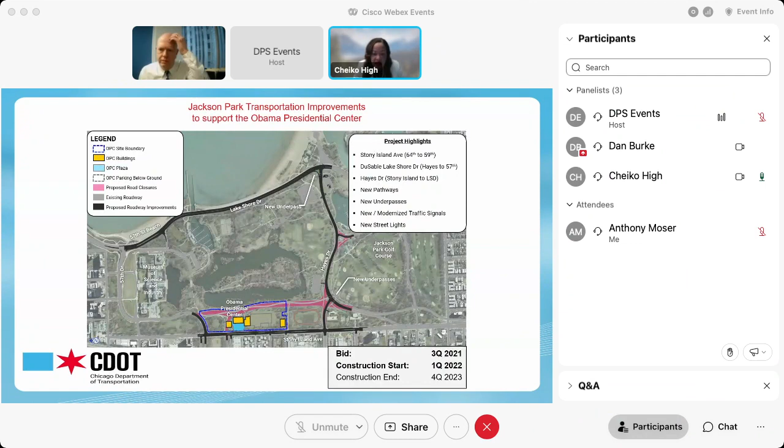This project did not take a quick route. It took us about 5 years to make sure that we got this contract tight when it comes to workforce, contracting opportunities, and partnerships. Our partnerships include the Park District and, of course, the Illinois Department of Transportation. So this was a collaborative effort for all entities.

The scope of this project, safety is always first. So we're going to have components of safety, not only with traffic signals, but also roadways and pedestrian safety, bike safety, things of that nature.

One of our closest partnerships to make this opportunity what it is today is working with the Chicago Cook Workforce Partnership, between the Partnership and FH Paschen. We're really going to make sure that we meet or beat our contracting percentages for this job. You can find out more information about this job at our website, jacksonparkimprovements.org. Next slide.

Specifically, we're going to take a deep dive on what we really did different and better on this job when it comes to workforce and contracting goals. This project has the highest ever project goal for local area residents, and that percentage is 15%. That means 15% of workforce hours performed must be by residents that live in that area.

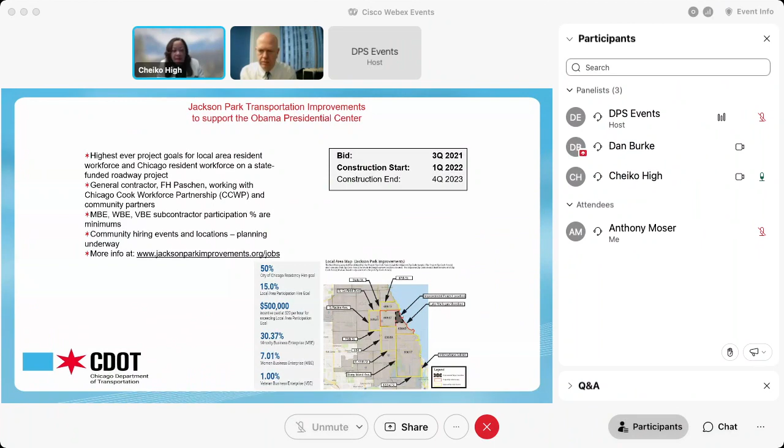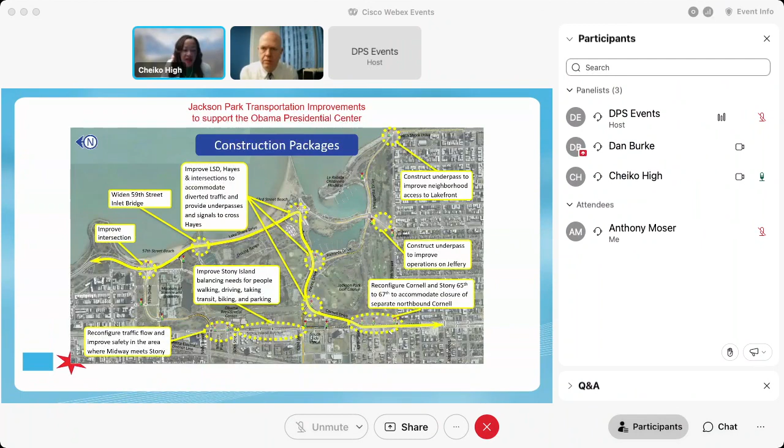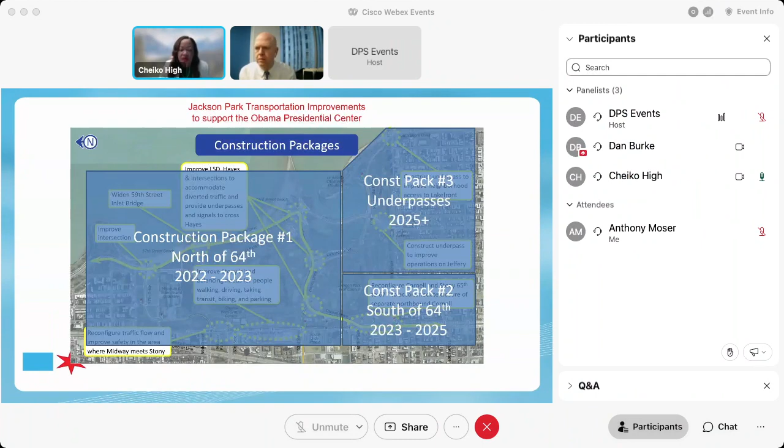With this, if you hit the button one more time, it will highlight bid package 1. That package was already awarded to FH Paschen. Package 2, and I think this is an opportunity that most of you are here today to hear about, construction package 2 will be south of 64th Street in the year 2023. And the final package, package 3, will be in 2025. Next slide.

This is an aerial view of Jackson Park, and this is basically the work area that CDOT will be improving throughout the Jackson Park area. Next slide.

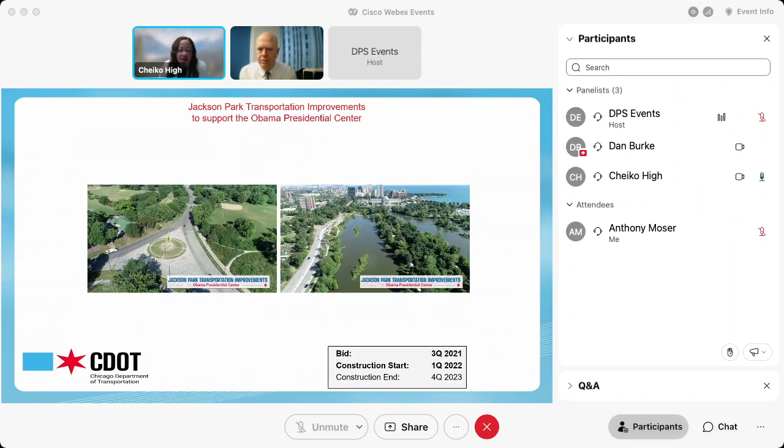Thanks, Chieko. Yeah, just a lot of exciting things happening in Jackson Park to support the transportation improvements for the Obama Presidential Center. So some more, let's get back to some of the work we have coming out this year.

We're really excited about our 2022 Arterial Resurfacing program. There's 37.2 miles of roadways that'll be in 4 contracts. We anticipate bidding those contracts late Q2 of this year, with the start in the 3rd quarter and construction in the 2nd quarter into 2023. Again, as usual, it will be split into 4.

We split the city into 4 zones: north from city limits to North Avenue, from North Avenue to Cermak, from Cermak to 79th, and then from 79th south to the city limits. Look for those again, hoping to get those on the street here soon.

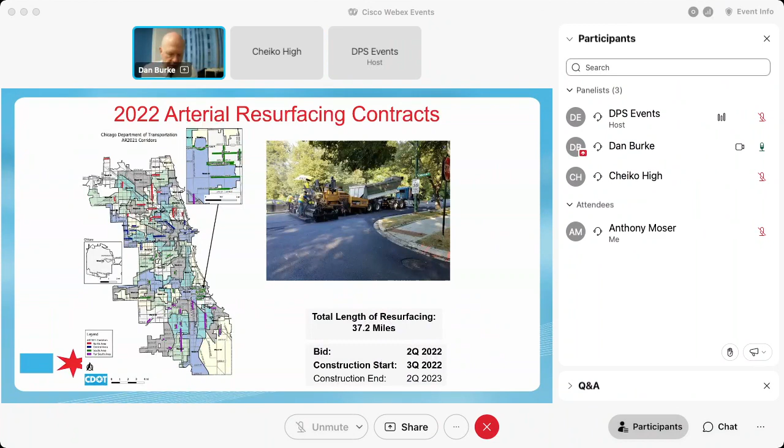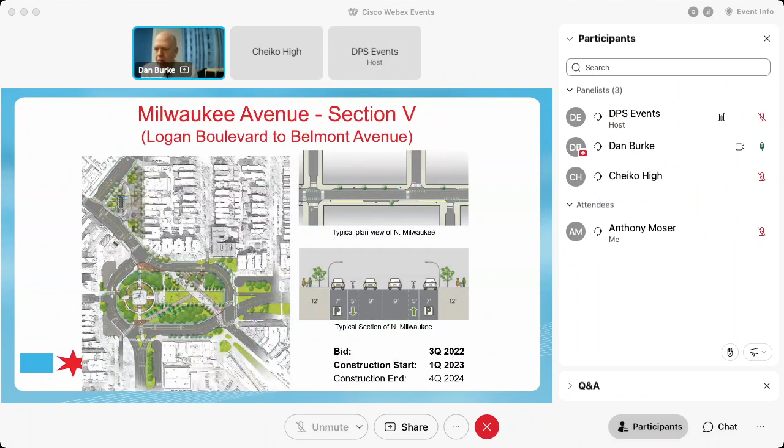Milwaukee Avenue, Section 5, Logan Boulevard to Belmont. This is an exciting street reconstruction and streetscape project with a lot of community involvement and input. We're seeing a redo and reactivation of Logan Square and the monument area. We're looking to get this project out to bid third quarter of this year, with a 2-year construction schedule.

Lake Street, Ashland Avenue to Halsted. This is a complete reconstruction of the full Lake Street right-of-way. I believe this is the eastmost and final segment of this project. We're excited to finally get this one out to bid and going. Look for this to be bid fourth quarter of this year.

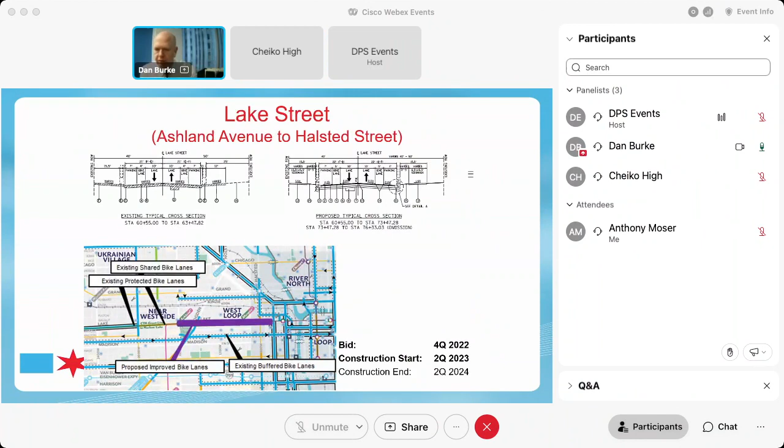Cermak Road, 47th to Kilbourn, viaduct vertical clearance improvements. We'll be looking to get this bid late second quarter of this year. It's a viaduct vertical clearance improvement project. We anticipate awarding that fourth quarter this year, and I believe there's a 12-month duration on that construction.

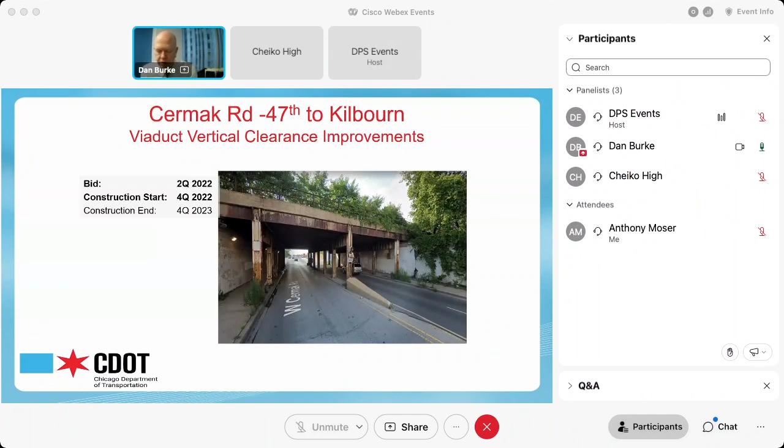On the transit side.

State Lake Elevated Station. This is a new signature station at the corner of State and Lake Street on the Loop elevated system. This was designed by TranSystems and SOM for the Chicago Department of Transportation, in cooperation with the Chicago Transit Authority. Now we are piecing together funding and looking to have this out to bid fourth quarter of this year, with construction start second quarter in 2023 and a 2-year construction schedule.

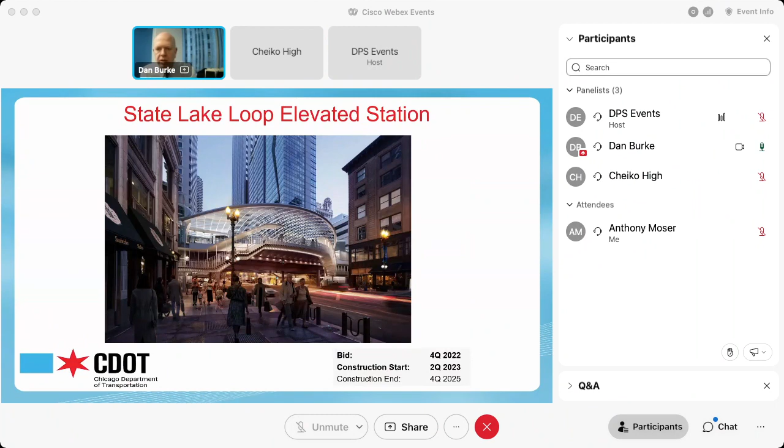It's going to be a transformational project. That existing station, as many of you may know, dates from the 1890s. Its platforms are only 7 foot in width. It's the second busiest station on the CTA system. This is going to be a complete replacement of that station with a really exciting modern 21st century transit facility.

Just some more renderings and concepts on that, what it's going to look like. It's going to have a domed glass enclosure, with a lot of beautiful new state-of-the-art amenities, and it's going to change the dynamic of that corridor as well. We worked very closely with the State Street Council and all the surrounding businesses on putting together this plan and building a coalition around it.

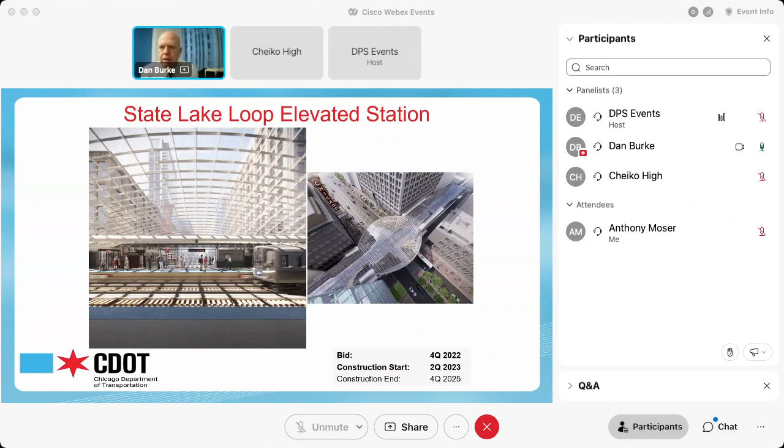Streetscapes. A lot of streetscapes coming out this year. We're excited to be putting these on the streets. This is Lubica Benick in our project development group, and she's extremely busy this year. These are the neighborhood type improvements that bring reconstructions of primarily business districts, the public way within business districts, and really activate and create great public spaces for people to use and to support those area businesses.

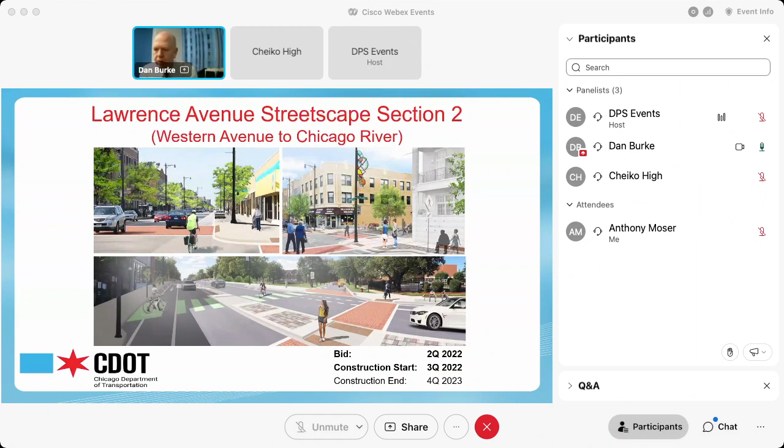This one at Lawrence Avenue, Western Avenue to Chicago River, we anticipate bidding second quarter of this year, hopefully getting it started late third quarter.

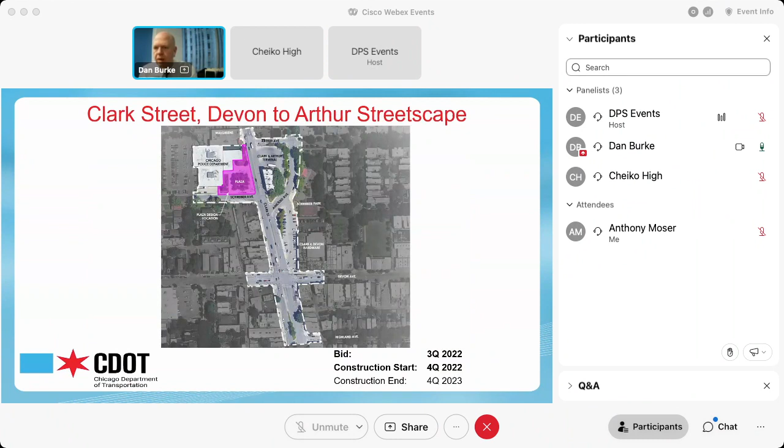Clark Street, Devon to Arthur Street streetscape, another streetscape, looking to go out with that third quarter of this year, with the contract award in fourth quarter and a 1 year construction schedule.

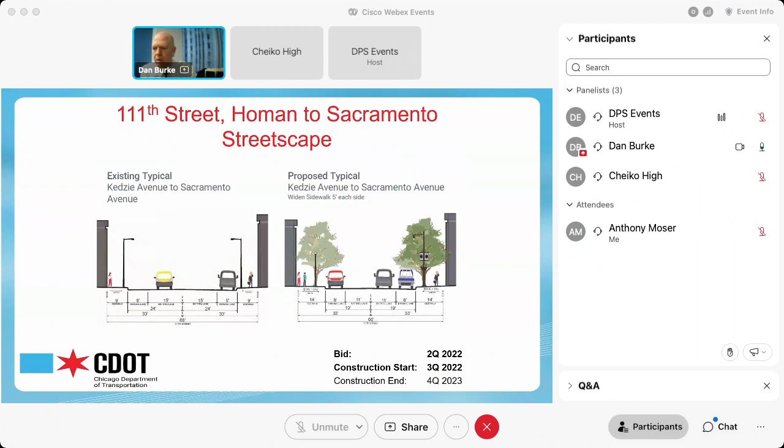111th Street, Homan to Sacramento streetscape, just some exciting things. If you look at the two cross sections between the existing and what you have today and what the revised will look like, and just the activation of that space and the architectural enhancements to that community. Looking to put that one on the street second quarter of 2022 with the construction start in third quarter and a 1 year construction schedule.

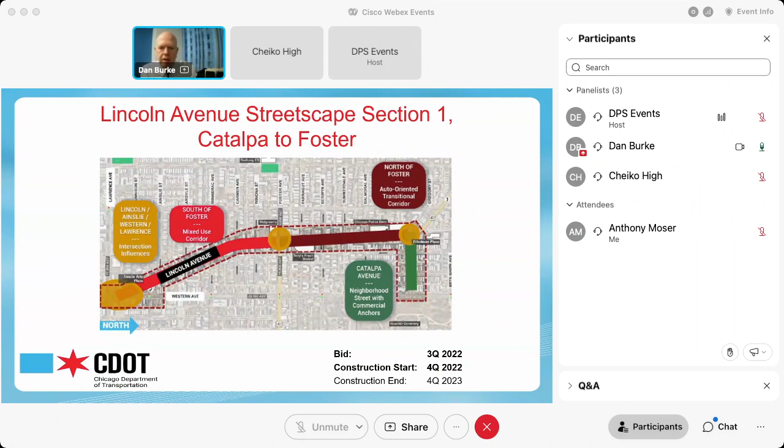Lincoln Avenue Streetscapes, Section 1, Catalpa to Foster Avenue. I believe there are 3 segments in this, and this is the first of those 3 segments. This will be bid third quarter of 2022 with a fourth quarter start and again a 1 year construction schedule.

Invest South/West South Chicago, Commercial Avenue, Section 1, corridor improvements. This is 90th Street to 92nd Street corridor improvements. This will be bid third quarter of this year, hopefully awarded fourth quarter, with a 1 year construction schedule as well.

Lubica and our team are working very aggressively to finish up, get community input on these, and work through the design and get these put up on the street for bids.

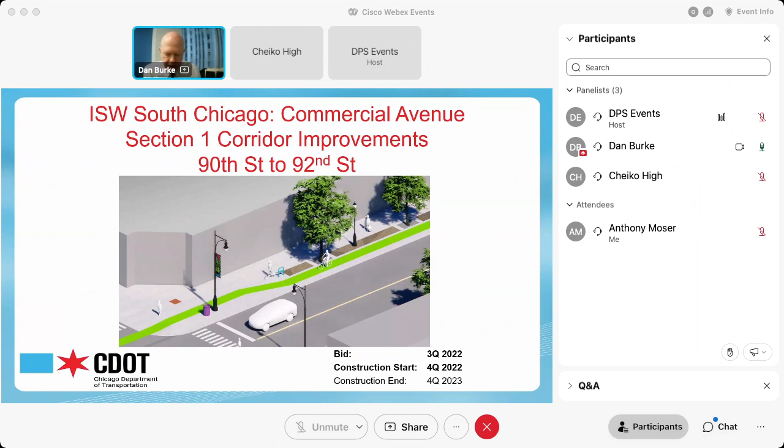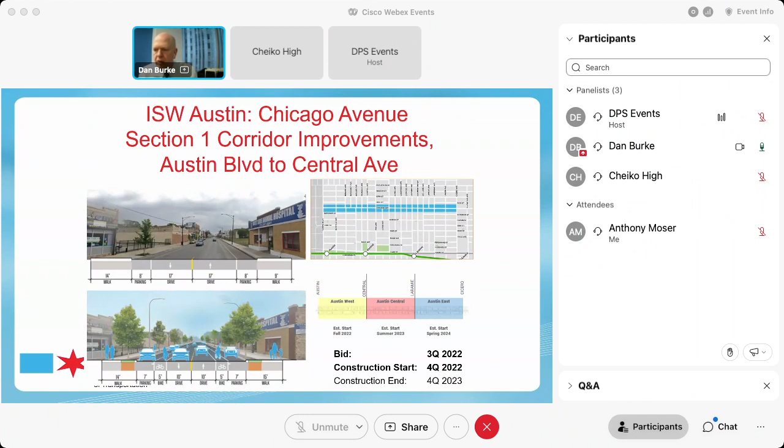Invest Southwest Austin, Chicago Avenue corridor improvements, Austin Boulevard to Central Avenue. There's been a lot of planning process and community input on this. We're excited to be bringing this one to fruition. This is the westernmost portion of the project, and we anticipate bidding it late third quarter of this year.

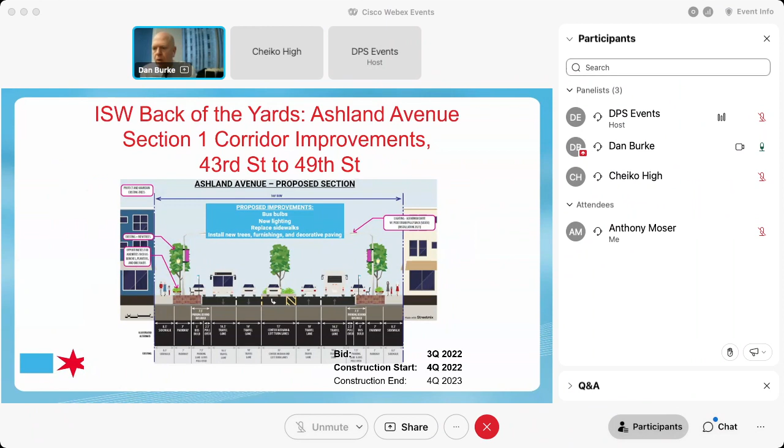Invest South/West, Back of the Yards, Ashland Avenue Section 1 corridor improvements, 43rd to 49th Streets. Looking at that cross section of Ashland Avenue, it's really a very ambitious and game-changing streetscape with a lot of architectural enhancements and placemaking, really changing the whole dynamic of that corridor. Look for that to be bid third quarter of this year.

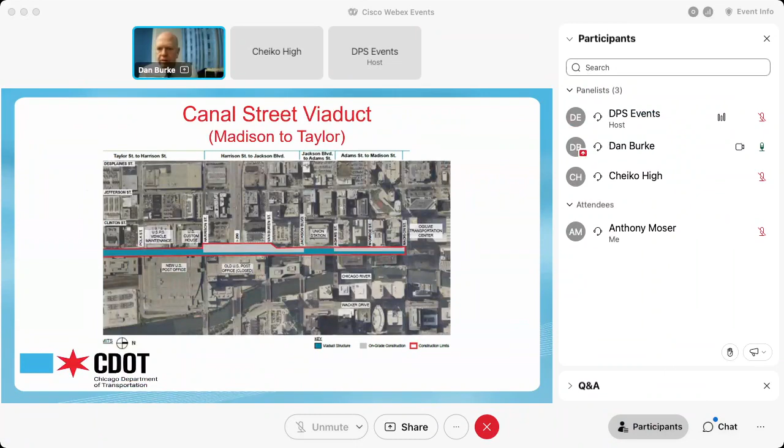Bridge reconstructions. Canal Street Viaduct, Madison to Taylor. This is the first of four. Madison to Taylor comprises 4 sections of Canal Street that will be bid this year successively. This is a division of those. A lot of people may not realize, but Canal Street is a viaduct. It's over the westernmost track of Union Station, both the north train shed and the south train shed. Those tracks extend out to almost the midpoint of Canal Street. It's going to be a very complex, impactful, and involved project.

Mort Kent on our team is the project manager, and Luis Benitez are managing these projects. It will be put out in 4 packages. The first will be Madison Street to Adams Street, Adams to Jackson Boulevard, Jackson Boulevard to Harrison Street, and Harrison Street to Taylor Street. Look for those 4 packages to go out starting second quarter and probably through the first or second quarter of 2023.

Division Street bridges and roadway improvements, Kennedy Expressway to Cleveland Avenue. We're working through some design issues on this. This is a really exciting project. It's a complete reconstruction of the whole Division Street corridor from I-90 to Cleveland Avenue, just west of Clybourn. Fingers crossed, things go well, we'll get this bid fourth quarter of this year with a construction start in second quarter of 2023 and construction end in fourth quarter of 2024. Two brand new bridges in this one, and a widening and reconstruction of the street in that entire corridor.

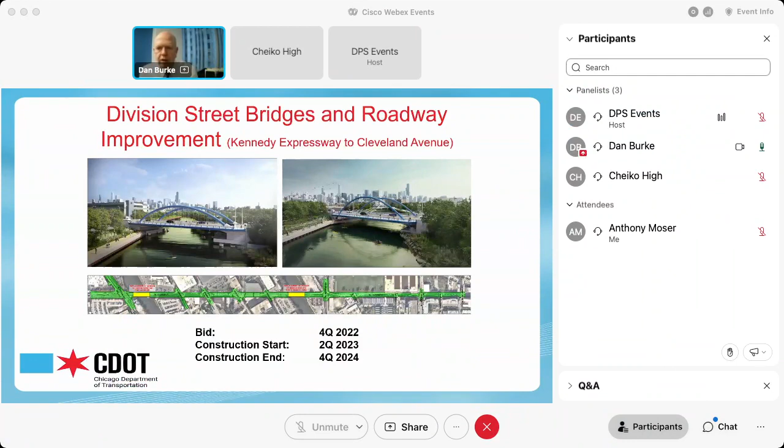Grand Avenue Bascule Bridge repairs. This structure is a double leaf trunnion style bascule bridge, approximately 270 feet long with a roadway of 36 feet. It was originally constructed in 1914. This project is currently out to bid now. I believe there was an opening scheduled for this morning, and there's an addendum that came out late yesterday or today extending that for 10 days.

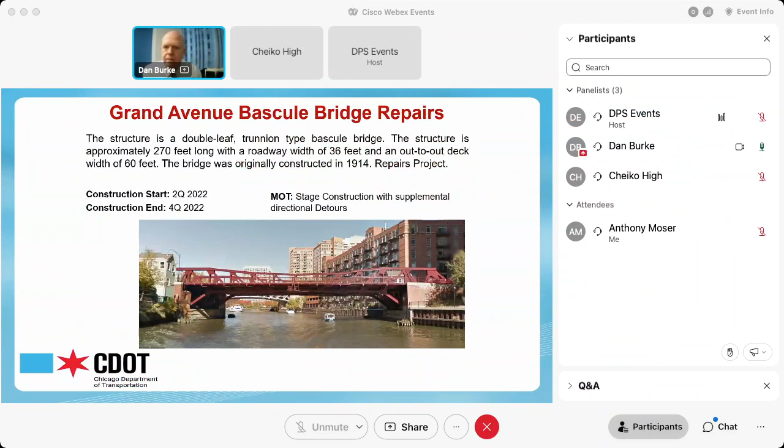31st Street Bridge over Metra CN Railroad is located in the historic Burnham Park and originally built in 1926. Both superstructure and substructure will be replaced, deck width will be increased, and the architectural facade will be replicated on the new structure. This one is all ready to go. We're just dotting the I's and crossing the T's, hoping to see this on the street in a couple weeks. If things go well, we'll look to have the construction contract awarded third quarter of this year and construction end fourth quarter of 2023.

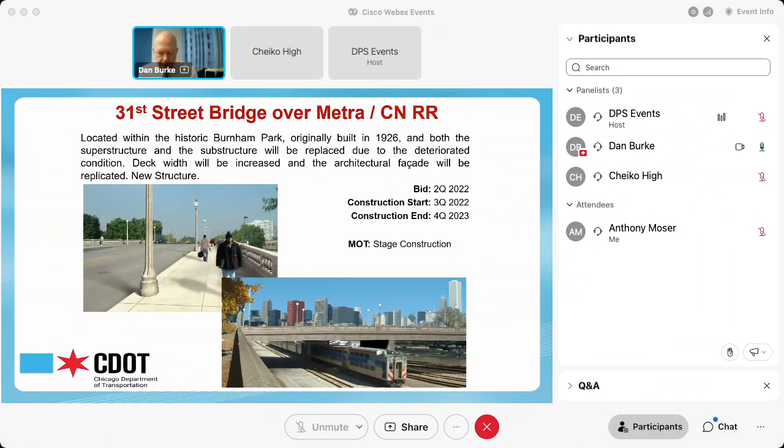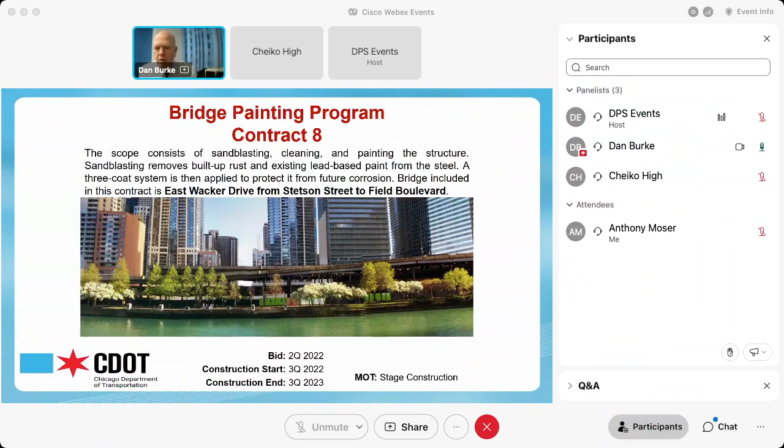Bridge painting contract 8. Anyone familiar with our program knows we do a lot of bridge painting to try to keep all our structures in great condition. It's the sandblasting, cleaning, and painting of the structures. This one is for East Wacker Drive from Stetson to Field Boulevard. Second quarter this year bid start, third quarter, and it's a 1-year duration on this one as well.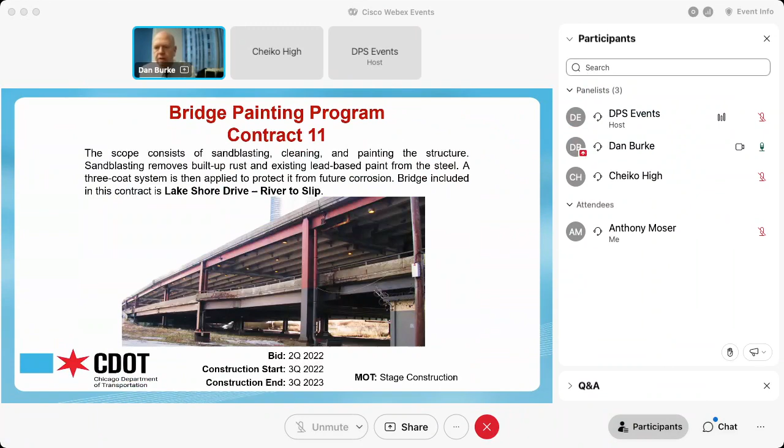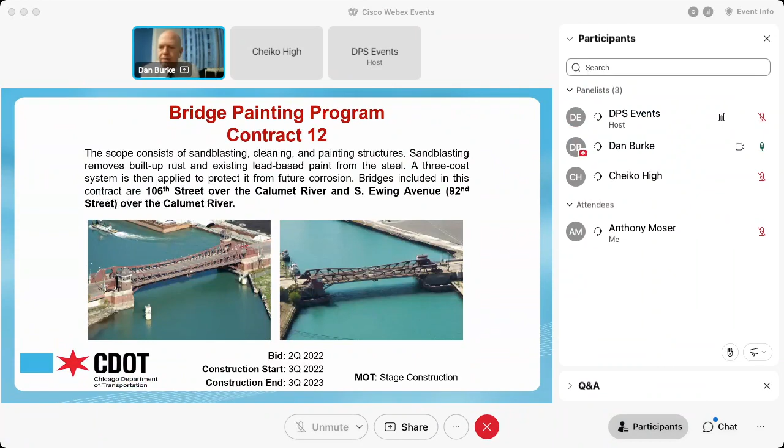Bridge painting contract 12. More bridge painting - we're looking to get 106th Street over the Calumet River, South Ewing Avenue, and 92nd Street over the Calumet River painted as part of this contract. Bid second quarter this year.

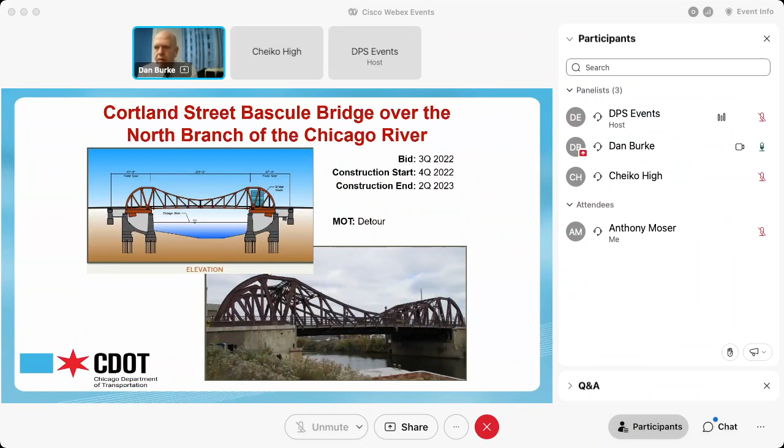Cortland Street Bascule Bridge over the north branch of the Chicago River. Looking to bid this project third quarter of 2022. This will commence with the completion of the Webster Avenue Bridge reconstruction, which is going on right now. Construction start fourth quarter of this year with a construction end of second quarter 2023.

Indiana over the Little Calumet River, bridge rehabilitation. Just extensive repairs to that structure, bid third quarter of 2022. Fingers crossed, construction start fourth quarter and construction end in fourth quarter of 2023.

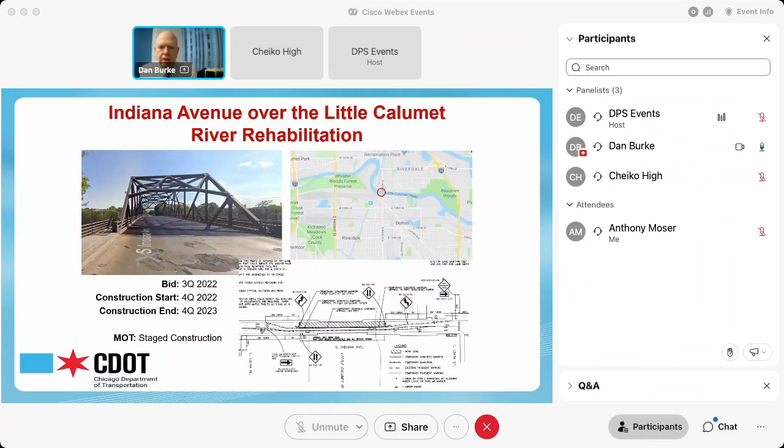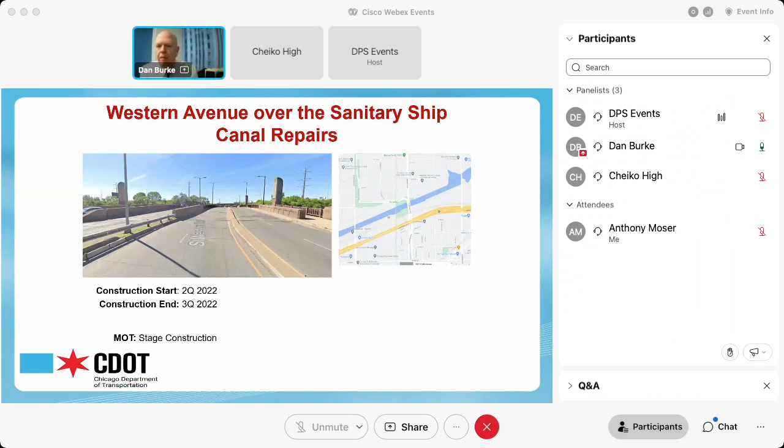Western Avenue over the sanitary ship canal just south of 31st Street. This project will bid second quarter this year and construction end... I think that's a typo, that should be third quarter 2023.

Projects that we have out on the street right now: the tunnel inspection and maintenance repair services, bids are due the 25th, so tomorrow. I'm hoping to get some good bids on that. If you're considering that, please sharpen your pencils and get us some good numbers.

Fullerton Avenue improvements, this is essentially streetscape street reconstruction from Narragansett to Lockwood. Bids are due there on March 28th. And then Grand Avenue bridge repairs were due today, but that bid date has been extended.

At this point, I'll turn it over to Deputy Commissioner Cheiko. Hi, thank you Dan. As you can see, CDOT has a whole lot of work out there. I want to take the opportunity to share with you all that for the first time ever, CDOT has target market DBEs out there.

Under the category for design, we have a total of 21 contracts that were awarded. I'm sure you all know what the target market is - it's a makeup of a pool of only MBE and WBE firms. So again, for the Department of Transportation, we have a total of 21 DBEs for design.

We also have a total of 20 contracts target market for construction management. To date, close to $60 million has been issued in task orders for design DBEs, and a little over $30 million has been awarded under the target market DBEs for construction management.